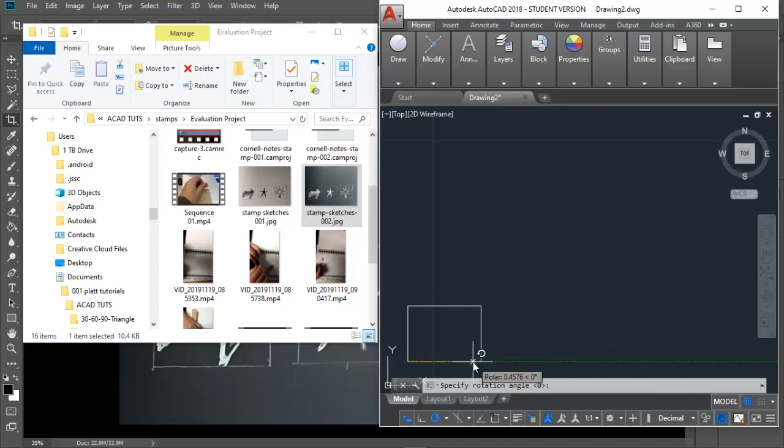Okay, there's the image. Now I'll expand the screen, and I'm going to come up here to Layer Properties and open that up. And we're going to create our own layers.

For the most part, we knew that the scanned image came in on the first layer, the 0 layer, and we're going to change that. So I'll come up here to this icon that lets me create a new layer, and I'm going to call this Scanned or Photo. Let's call it Photo. Okay, and I'm going to change the color to, let's go with kind of a light blue.

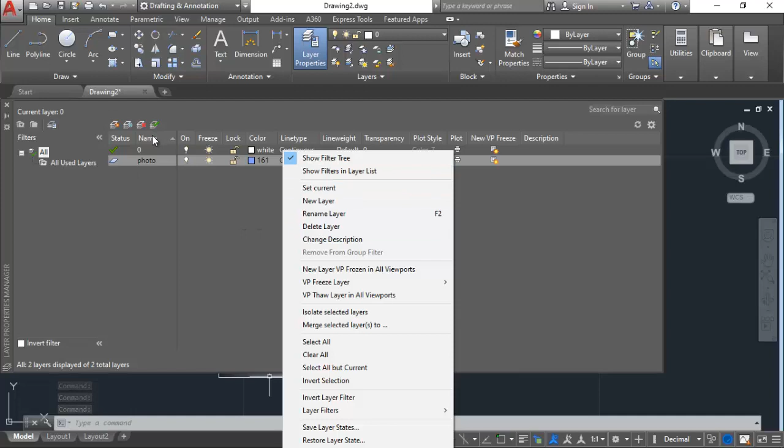Now I'm going to create a new layer by right-clicking, or again come up here and hit this icon right here, and I'm going to call this... call it Sketch. I think Drawing sounds better. Okay, do that. Change this color to something that's a contrast. I'll probably go with this orange right here. Hit OK, and I'll go ahead and collapse that layer.

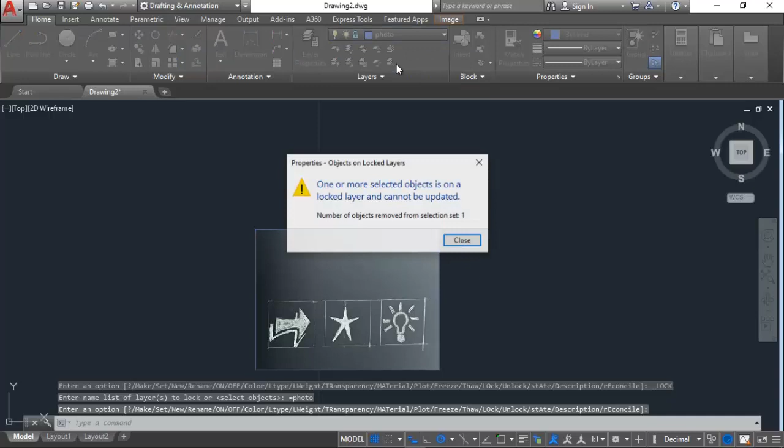And I'll zoom up here, and I'm going to select this layer here. I'll do a right mouse click and drag up, and come back over here to Home, and down here to Photo. I'll put it right there, and you can see the highlighted blue, and that's good. Now what I'll do is come up here and lock that layer, and I'm going to double click on that. Okay, close. Back to Layer Properties, and I'm set to Drawing, so that's good.

Okay, and we'll start our drawing here in a second. Alright, I'm going to scroll up here on this particular part of the drawing. Now I can draw all three of these at once, but for this purpose, what we're trying to get across is how to draw a quick stamp.

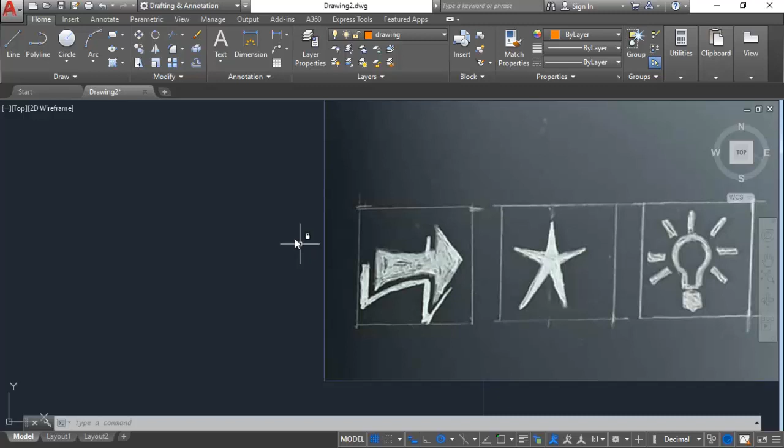Now that we've zoomed up on that, I'm just going to quickly come up here and hit my polyline tool up here. I can do P-line as a key-in. I'm going to start drawing this guy in. I'm not too worried about how accurate it looks or anything like that, because it's just going to be a quick little rubber stamp that we create.

Zoom up here, come across. Now one thing that's real helpful is to go ahead and turn polar tracking off when you're actually drawing, so you can kind of get closer to the object that you're creating.

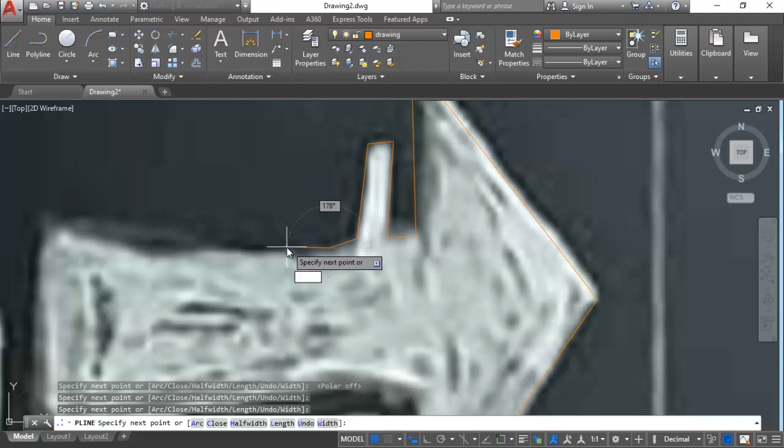Now, actually what I'm going to do now is hit Escape, and I'm going to zoom out here and select this. I'm going to delete it. Let's go ahead and delete that and start over here real quick.

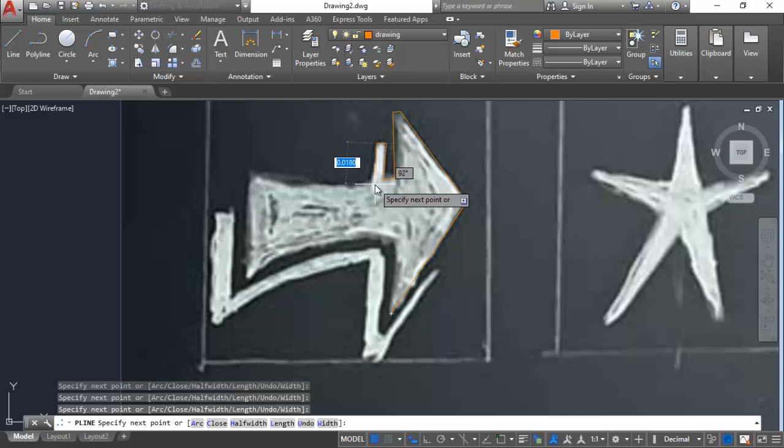So go back to the polyline command. Draw this point here, this point here, a little over there, kind of come down at an angle, come up here and here, and I'll hit escape. Then I'll come back here on the end and draw a shape down here using another polyline.

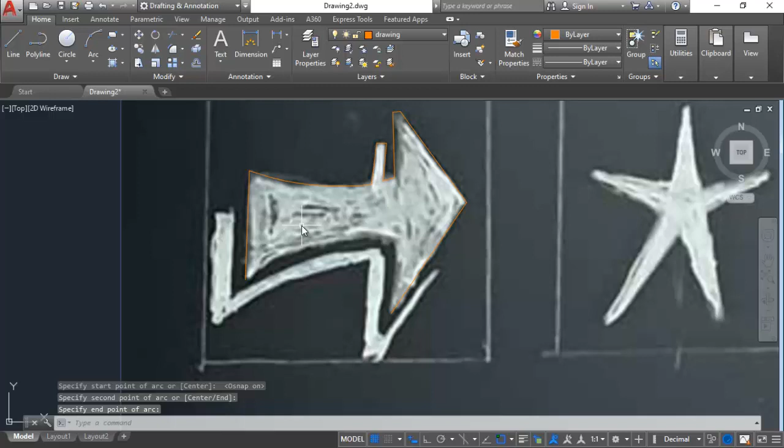Hit escape again. The reason I did that is I'm going to come in here and place an arc in there, so I'll make sure my snap tracking is on. Grab this, draw myself a nice little arc and snap to that other polyline. Okay, it looks good.

Now let's go back to polyline real quick. We're going to come over just a little bit. I'll zoom up here, zoom back out, come up to about right there and hit escape. Go to arc and draw one in there as well.

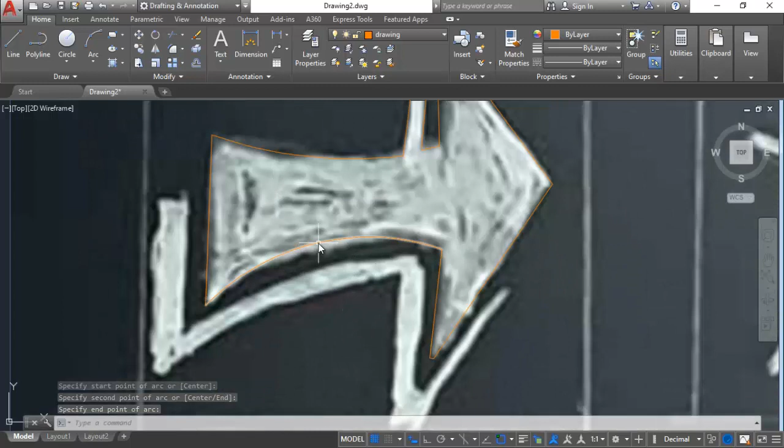Okay, now let's snap on this, and I can pull this arc down just a little bit. That's fine, I like that. Now what I'm going to do is come out here and hit escape a couple times.

I'm going to select this, and then hold my shift key down to get both of these, and hit the J command, which is join. As you can tell now, these two are joined.

I'm going to select this guy again, and then select this one here. I had to turn my alarm clock off, and hit this one and J for join. Let's see if I got those. Yeah, I got those joined.

Okay, select him again, and then I'll select this arc, and hit J for join. Oops, I deleted it, do a Control Z. I wasn't too smart, let's try that again.

J for join, let's see if we got him joined. Yep, we got this one last polyline here to join. I select him, select that, and hit J for join. Looks like they're all connected. That's good.

Okay, quickly moving along, let's get our polyline command again and start drawing this object. Since I know I'm going to be placing an arc in here, I'll go ahead and start from this point right there, come up here, come across. It doesn't have to be perfect, just somewhere in the proximity of it.

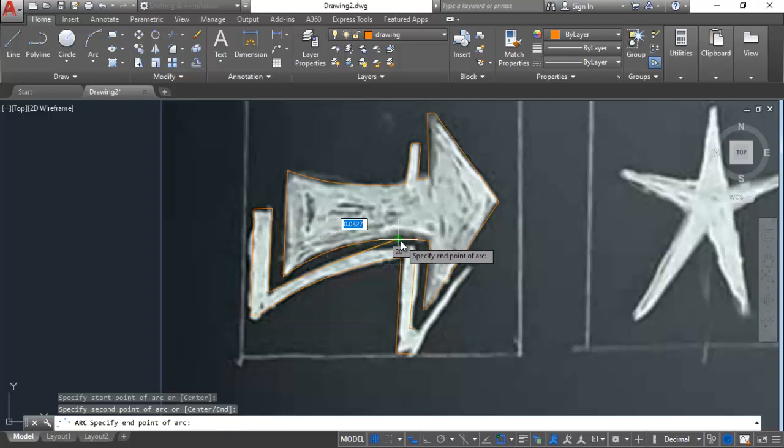Looks pretty good. Let's go back to the arc command here, place an arc in, one there, come up here, grab the arc command again, and I'll place it right there.

I'll go ahead and select that arc and play around with the center vertex of it. Just move it up a little bit. Maybe come down here and move it down a little bit if I can do that. Yeah, it looks pretty good, we'll go with that for now.

Always use your middle mouse button to zoom in and out, it makes things a whole lot easier. Put a little arc in here, out to about right there. Yeah, that's pretty good. I'll go back to polyline, click here, there, right there, that's good.

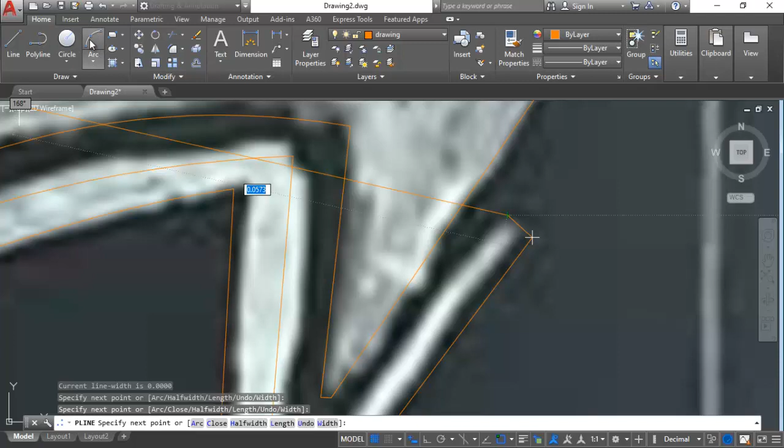As you can tell, I just went ahead and jumped from that one command, polyline, to the arc command pretty quickly. Sketch there, yeah, it looks good. Okay, as with before, we need to come in here and modify the vertices and connect everything up.

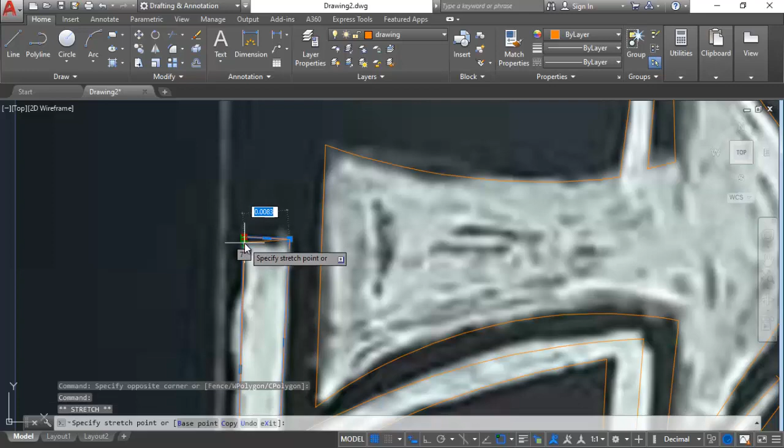Grab this, and I'll take this line, just kind of move it down a little bit. Now keep in mind, this is only going to be an inch, so it doesn't have to be too perfect, it's just going to be really small. All right, hit escape real quick.

That's correct. Come over here, select this guy, and hold my shift key down, get him, J to join, and so forth. I'll go around here and do all that.

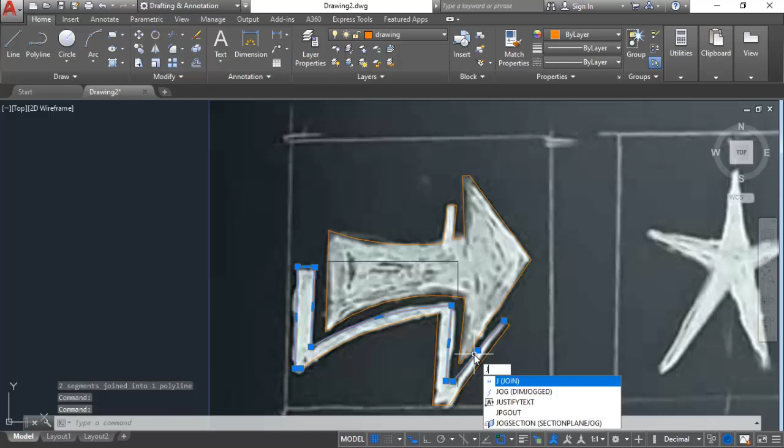Now I'm probably going to have to trim this, so let's fix that real quick. I'll select all this, hit my trim command there, and take this out right there. That's good. Zoom back out, escape.

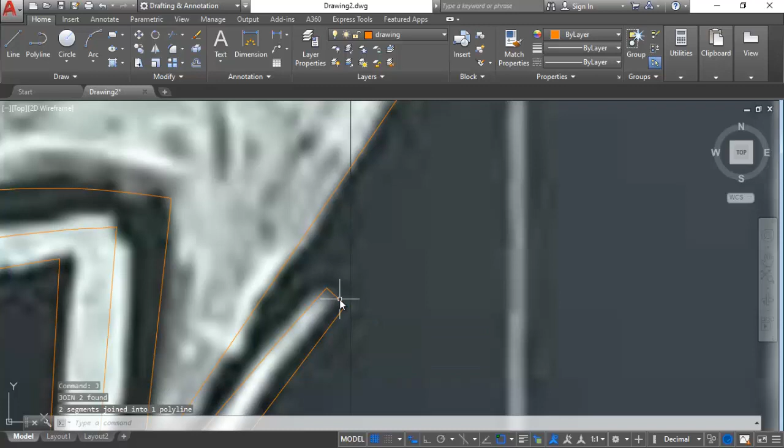Again, select the one I've got started, and hit J again to join those. I'll take this, hold my shift key down first, J to join. Oops, got the wrong one. J to join.

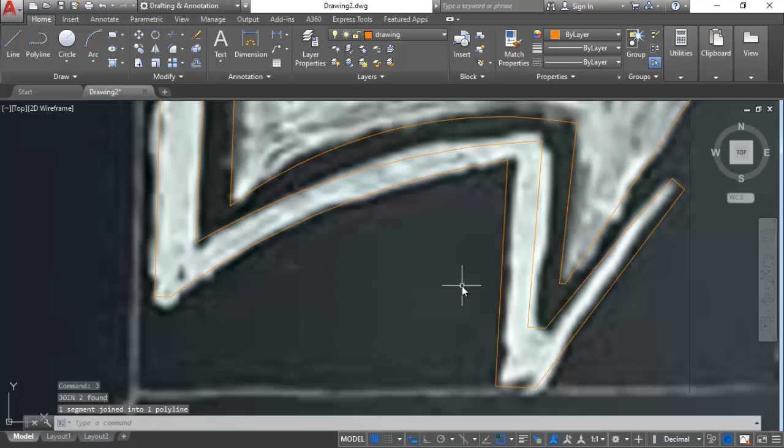Okay, zoom out, pan over, select him, and now select this guy, shift key again, J to join, and so forth. Go ahead and hit J to join. There you go. So, looks like everything's joined up together and we got most of our artwork done.

Sometimes if you hold your middle mouse button, it'll turn off that, and as you move a little bit, it'll turn off your scan picture so you can get a view of it. Yeah, it looks pretty good, I'll go with that.

Okay, now that you can see that I've got all this drawing drawn, now we got to create our 1-inch square and scale this down to fit that 1-inch scale.

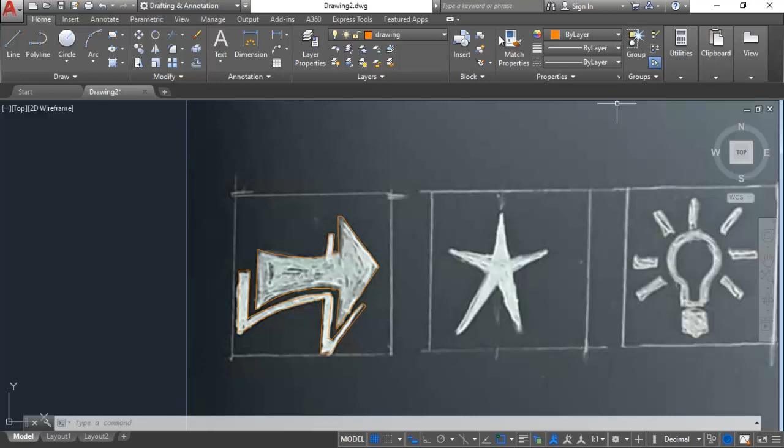So I'm going to come back up here to my layer properties. I'm going to select the photo, unlock it, and scroll out a little bit, snap on that photo. There we go. I'm going to delete it. So he's gone. The photo layer is still there, but I went ahead and deleted that.

And let's go ahead and see if I can get rid of that layer. Hit delete layer, go ahead, now it's down to this, and I'll go ahead and save my file just to be on the safe side here.

Let's give it a file name real quick. We're going to call this arrow, lowercase that. I'll put that in my, gotta go make sure I put it in the right place. So come over here to this, hit the pull down. This is on my C drive. I want to put it on my F drive, so come out here to that, go down here to users.

Make sure you're always saving your files in the appropriate place you can find them later. I used to save mine at school on what I call my shared drive. Always put it to where you can get to it from another computer.

And go up here to evaluation, hit save again. Okay, now it's saved. Go ahead and turn this off.

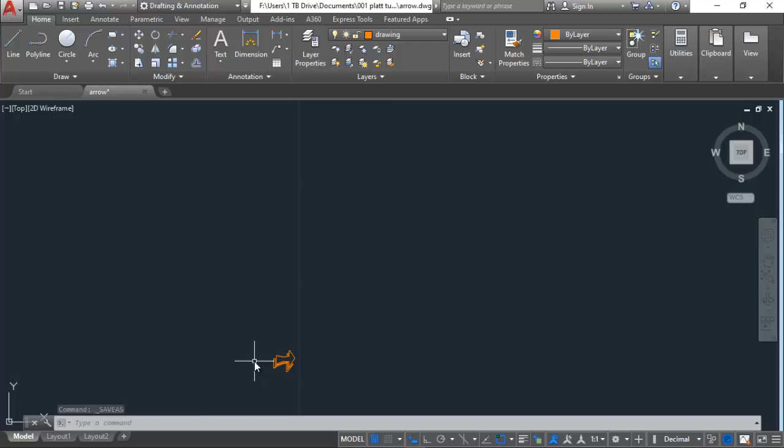Okay, now I can always come back and draw the other artwork that you saw earlier. But let's get ourselves to about right here. We're going to go ahead and hit the line command. I'll actually go with the polyline. Okay, I'll start here, and I'm just going to come over 1 inch. Oh, let's go ahead and turn on the polar tracking again. There we go. So again, 1.

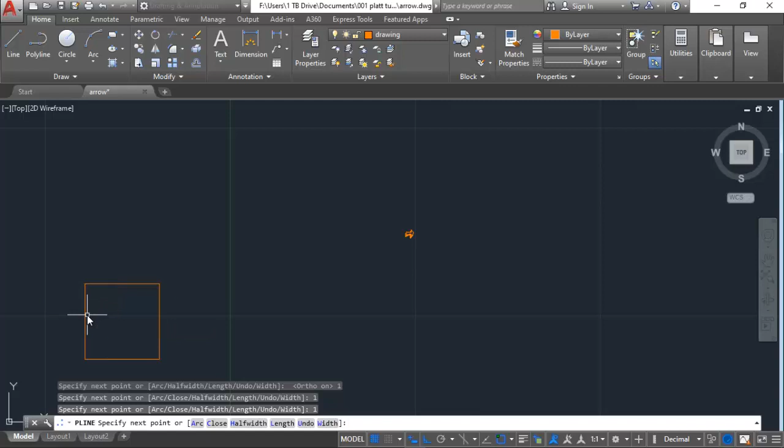Okay, I'll come back up. Again, 1 that way. In this case, I'll scroll over, again, 1 again. Just kind of come down a little bit, then hit the C command to close it. So there it is. This is good. So that's a 1 inch square. Obviously, my artwork is really small.

Let's go ahead and move it over there. I'll select the objects, hit enter, select the base point. I'm just going to grab it, put it there. Do it again. Whoops, kind of modified something there. I don't want to do that.

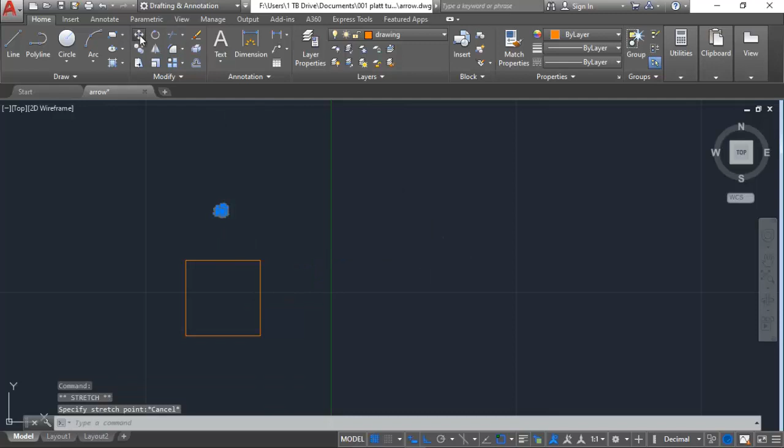Hit the move command and move it down here. And we'll roll up on that a little bit so you can kind of see it. Go ahead and select it again. Hit the scale, and I'll select the base point.

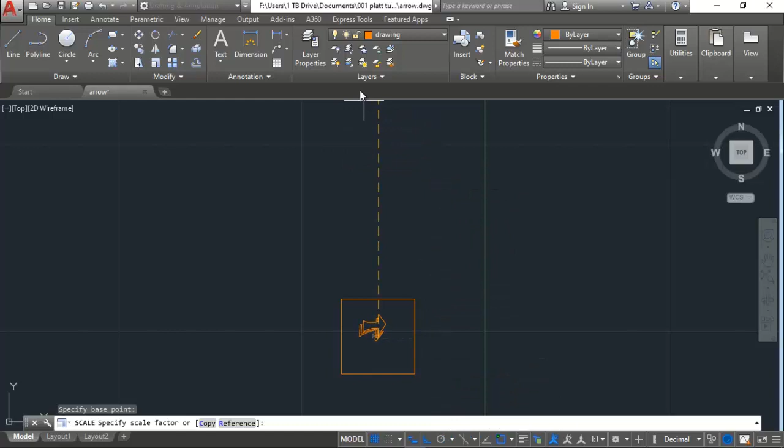And as you can tell, I can roll out here a little bit. Scale it up. And you can play around with scale factoring and all that. I'm just going to kind of eyeball it, put it in here. Scale it again. That's pretty good right there.

Yeah, I think I'll tweak that just a little bit. Scale it one more time. Go with that, about right there.

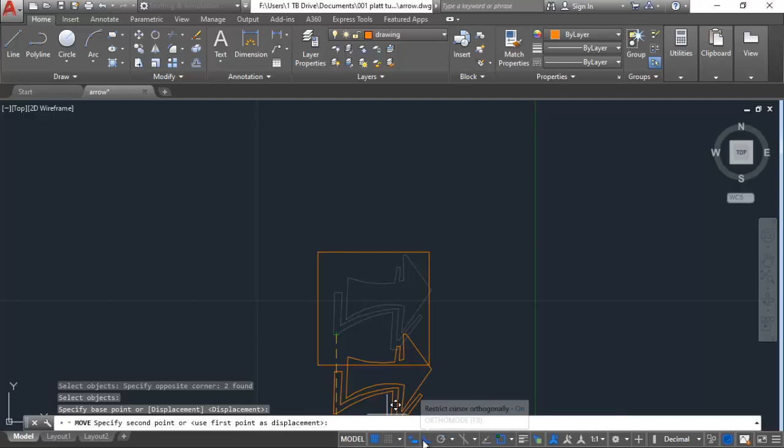Okay, now I'm going to move it down into the center. And I've got my object selected. Turn my tracking off here. I already have it turned off, that's good. Turn snap tracking off, so kind of get it about right there. That's so.

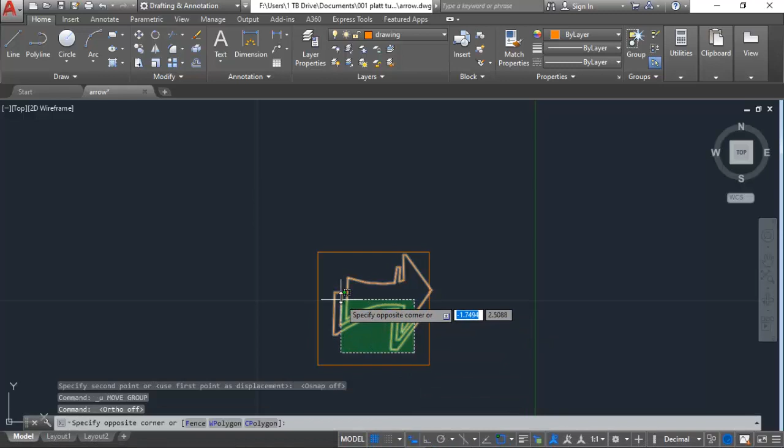Okay. Yeah, Control Z. Turn this orthogonal off, that's what's kind of bothering me right there. Oops, do that again. Select it, hit move again. That's why I was only moving in one direction, I had that orthogonal turned on. Turn snap tracking off. Oh, still had it turned on.

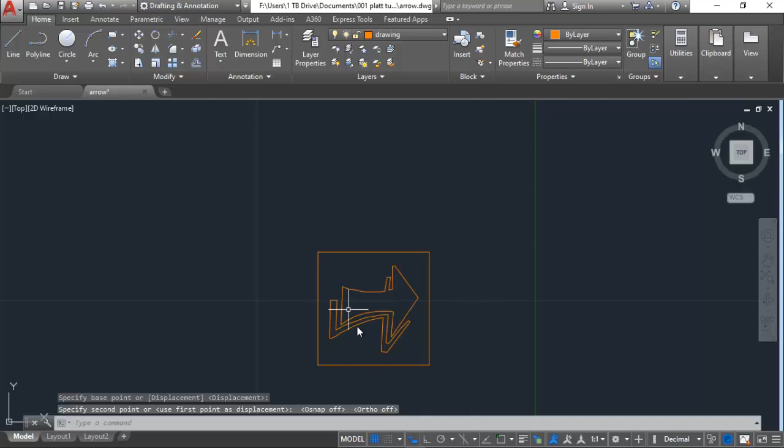Yeah, there we go. You're just trying to get it centered up inside what's going to be your rubber for your stamp. That looks pretty good.

So now I'm going to go ahead and save the file again. And then I'm going to save it as a DXF. Hit save as, I'll come up here, come down and select. I'm going to go with a 2012, R12 version of the DXF. Save that, and I'll hit save.

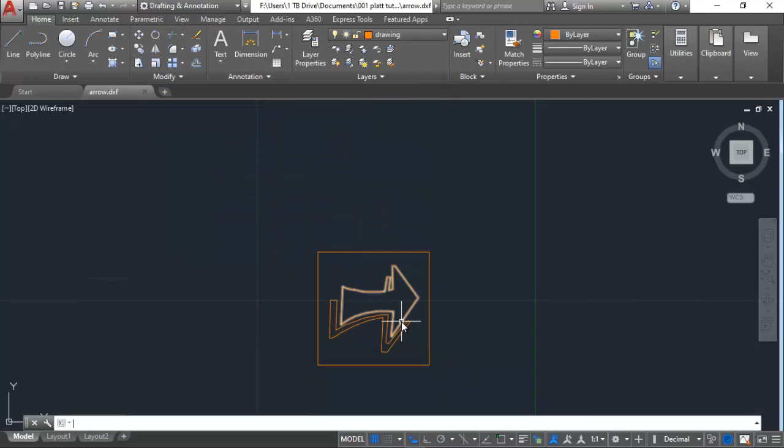Oops, I forgot to do one thing. What's important is I want this to be the direction my stamp goes, but if I'm making a stamp, I got to flip it. So let's go ahead and select all that again.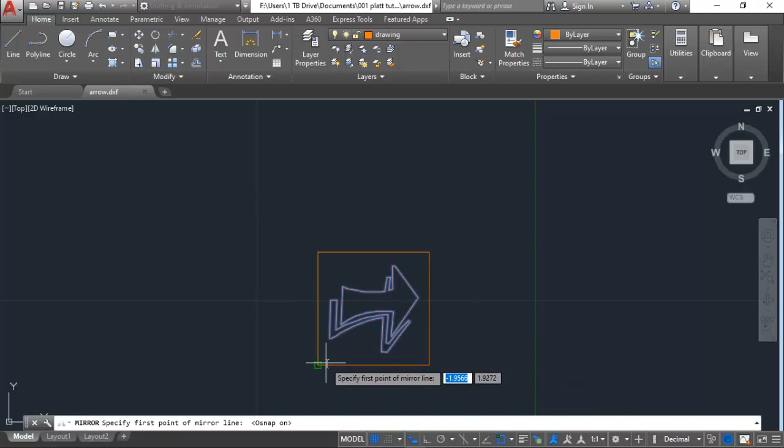Here, and now I'm just going to do a mirror. And I'll select a point to mirror off of. Oh, go ahead and turn snap tracking on. Here, make sure it's there. And do I want to erase my source object? Yeah, I do.

So go back to move again. Select all these objects, got them selected. Select the base point, just move it back to about right there. Perfect. Okay, that looks good.